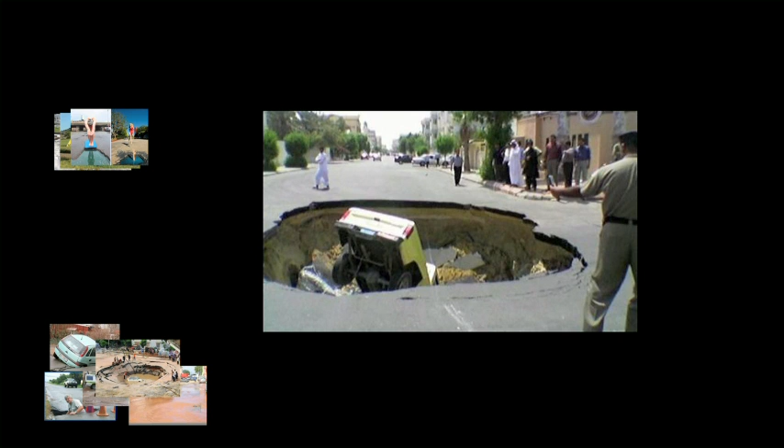I'm an engineer and geologist by profession. I've been at CSIR for 36 odd years, doing research full-time in various aspects of roads, specializing for quite a long time in unsealed or gravel roads, and this moves on to low-volume paved roads and then ordinary paved roads. My interest in potholes really started with gravel roads, because once they form, it's very difficult to get out. It just carried on as I moved into paved roads. I did a PhD through the University of Pretoria on gravel road materials and performance.

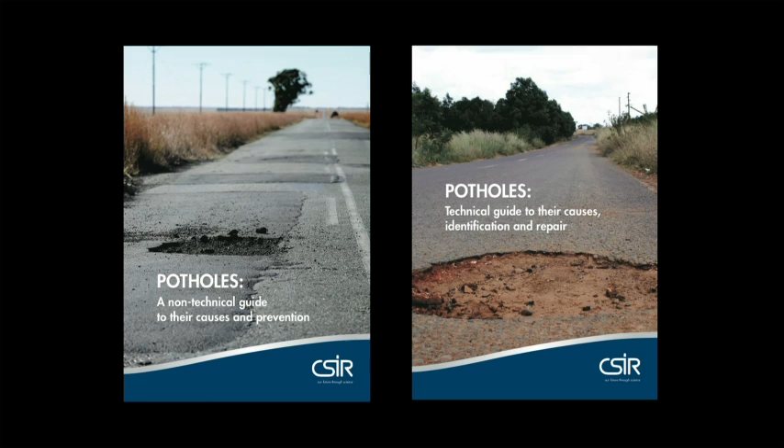Our CEO, president of CSIR, turns up in Parliament a couple of times a year, and in the early stages, end of 2009, early 2010, each time he went, everybody said, what is the CSIR doing about potholes? Essentially, we don't fix potholes, that's not our job. We do research and some initial training, then hand it over to people like the South African Road Federation to carry on the training. But the message came back that this was a worry to government, so we decided to do this project to put together the information we gained over the years into a document which would hopefully help reduce the pothole problem.

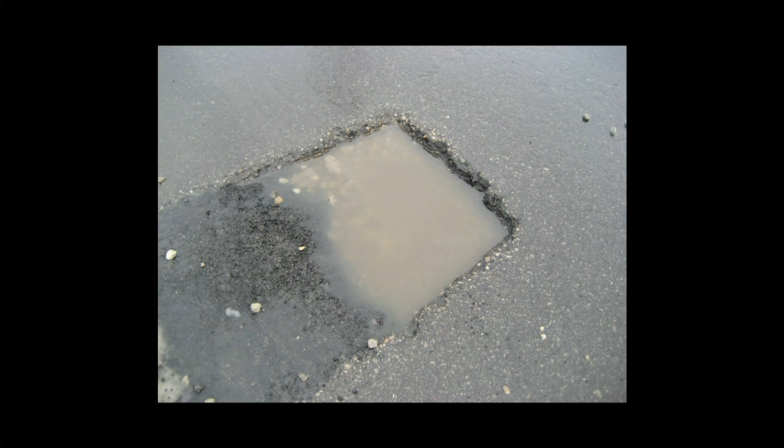It was a pretty wet summer season we had up here in the Highveld, and water and roads don't combine under traffic. With the excessive rainfall, fairly extended periods of fairly heavy rainfall, the roads started deteriorating. Potholes increased far more than in previous years, and basically the repairs couldn't keep up with them. So they became this visible, high-profile problem countrywide.

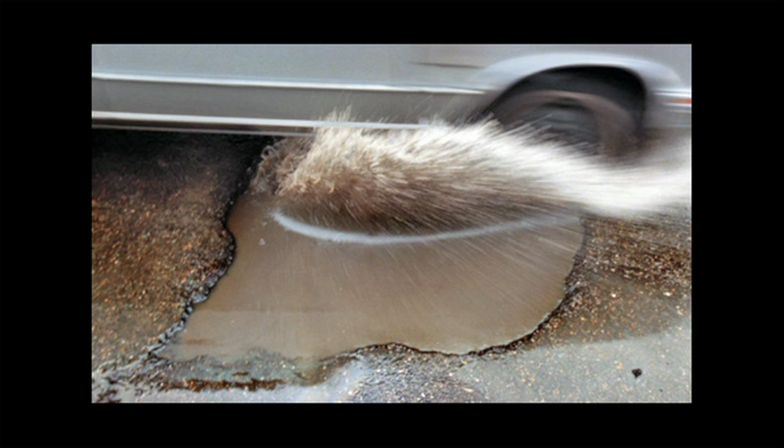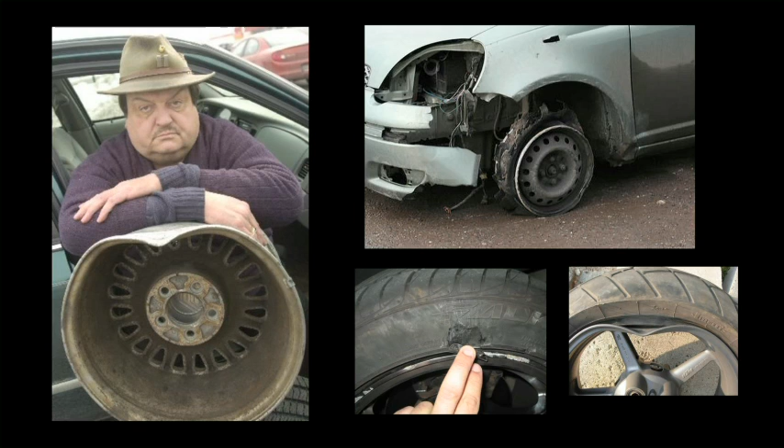Up until 2009, there had been a couple of fairly high-profile claims against road authorities for potholes - damage to vehicles, accidents on bicycles, things like that - but it was a fairly lengthy court procedure to go through. I think in 2009, 2010, where the damage was more tires, rims, some minor vehicle damage, people realized they could claim from municipalities and road authorities, and the claims started coming in. The authorities were suddenly saddled with all these claims, and they admitted responsibility in many cases and didn't even argue - paid up.

Not at all. We've seen in literature that the UK, Australia, over the last couple of years have also experienced extensive development of potholes, and in monetary terms far more than we actually need to put in to repair them. So it's not unique, but it's a legacy of cutting back in funding over the years, basically, in terms of preventative maintenance. If you Google potholes, you get quite a few million hits immediately, but they tend to be predominantly from America and Europe, and the origin or cause of potholes in those environments is somewhat different to ours.

There, where you have the so-called spring thaw at the end of winter, the frozen water in the road starts thawing out, it affects the road, softens the material in the road, weakens the road, and heavy loads on that type of material lead to potholes. That's not the kind of pothole we get in South Africa.

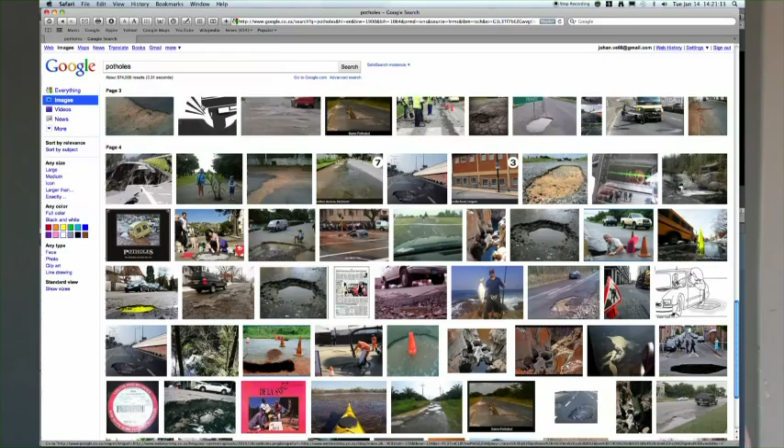The whole road network, right from the early 40s, 50s, when they started paving it, we use much thinner asphalt and thin chip seals, or spray seals as they're called. In Europe, it's not uncommon to have 100, 150 millimeters of asphalt surfacing on a road. Here, the maximum would typically be about 50, often 25 to 40. So our pavement structure is very different, primarily because of the drier, warmer environment - we haven't got the cold conditions in winter.

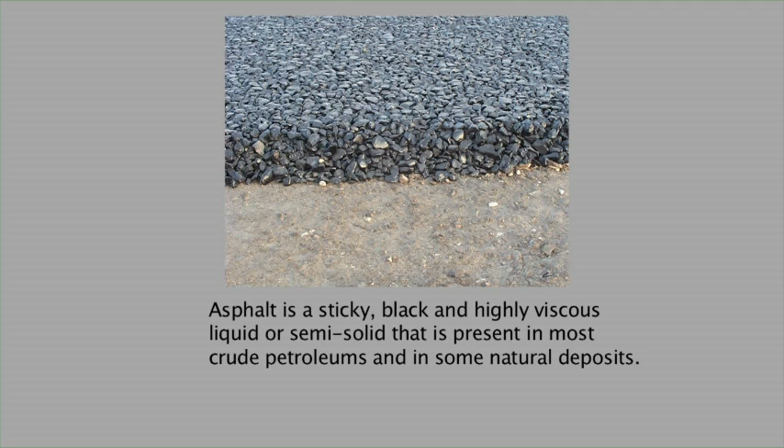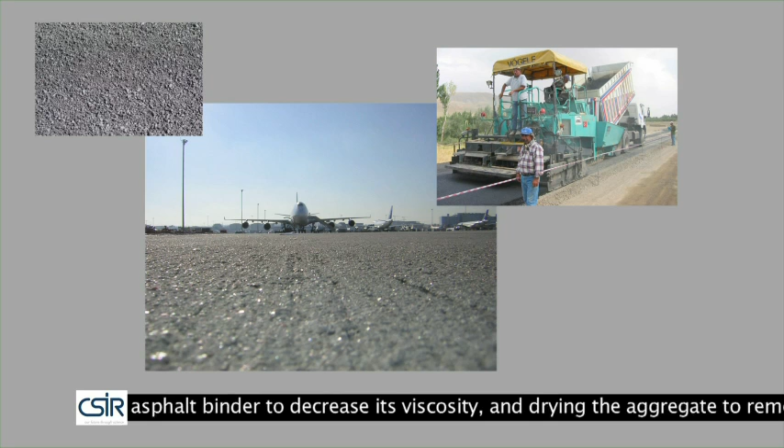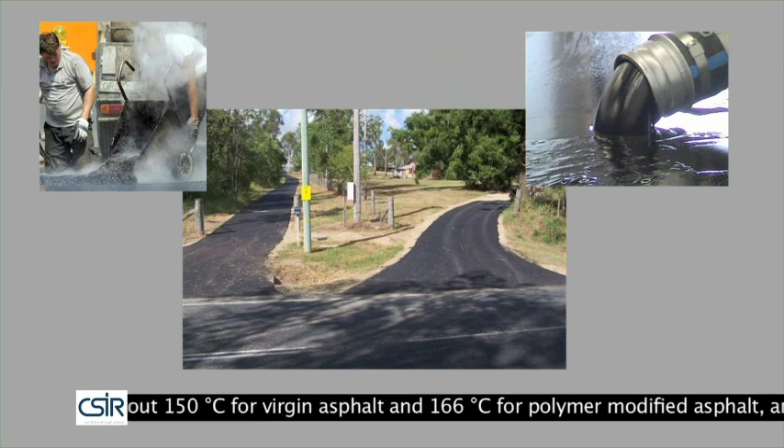Asphalt roads are paved with a mixture of stone and bitumen, and there can be two kinds. There's asphalt, made in a hot mix plant at high temperatures and placed in the road at high temperatures - a combination of usually aggregate, sand, bitumen, and some cement or lime or something. The other kind of paved road is the thin bituminous surfacing, where you spray a layer of bitumen on the road, put stone on that, roll it in, and that's basically it. Sometimes you can have two different size stones to make the seal.

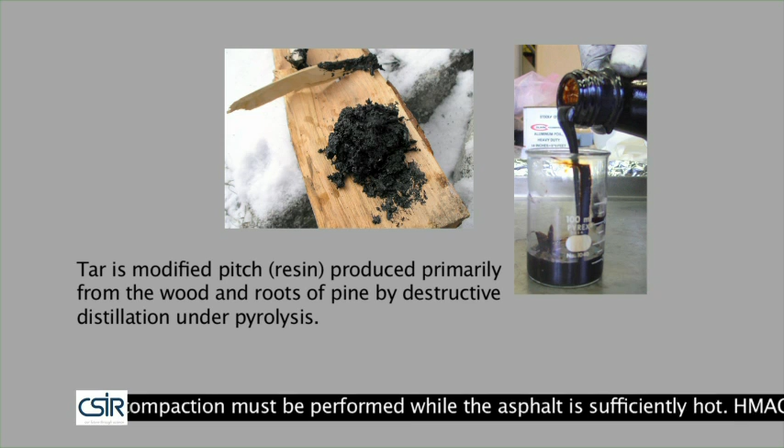Tar we don't use anymore - it's basically banned for use on roads in South Africa. It is carcinogenic. It's derived from coal, whereas bitumen is derived from oil - that's the main difference. And then there are concrete roads. In South Africa, we've probably got maybe 4 or 5% maximum of concrete roads, and a totally different process, which is cement, aggregate, sand mixed together.

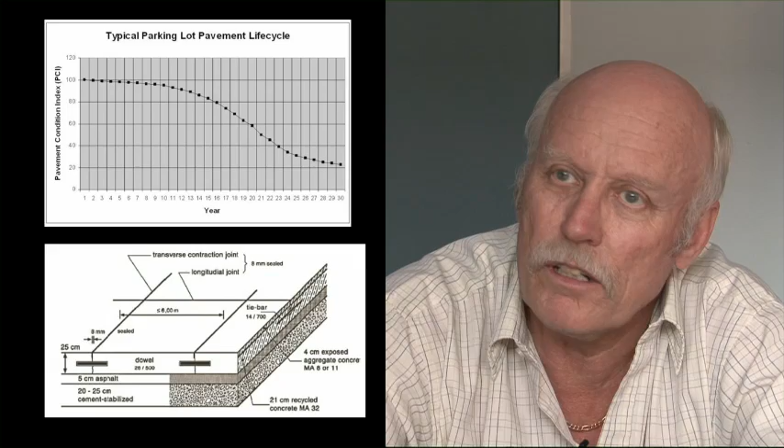A good asphalt road is designed to last probably 12 to 15 years with minimal maintenance. If the pavement layers are correctly selected, the materials, the pavement balance, and the asphalt are right, and everything's constructed properly, it should last at least 12 to 15 years without any maintenance.

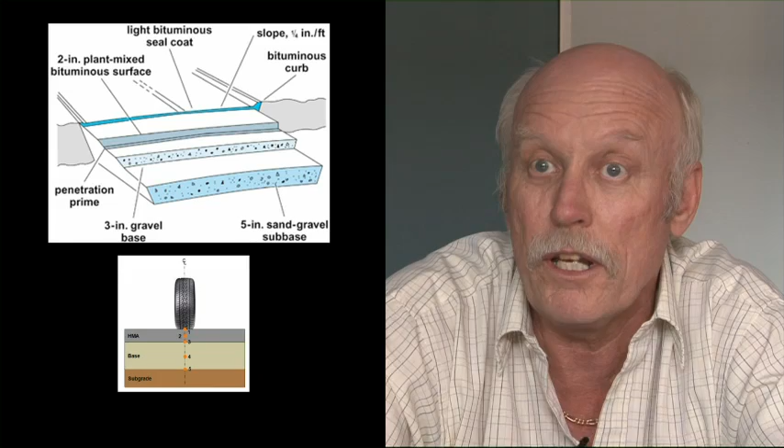If roads aren't maintained, the asphalt starts drying out and shrinking. It goes from a darker, blackish color to gray, and becomes stiffer as the bitumen volatiles evaporate. This stiffness allows it to deflect more under traffic, generating fatigue cracking from repeated bending up and down. That's the cause of cracking in an asphalt road, which ultimately leads to potholes when water gets into the cracks.

There are many different ways cracking forms in asphalt. One is poor drainage, leading to ponding of water next to the road. This could come from irrigation, seepage from a stream or dam, or, often in informal settlements, general drainage seeping into areas next to the road.

If that water lies there, it can soak into the road's structural layers beneath the asphalt, weakening them, so deflection under traffic is even higher and fatigue cracking happens quicker. It's really like bending a wire backwards and forwards - you bend it, it gets hotter and hotter, and eventually it breaks. That's what happens to a road.

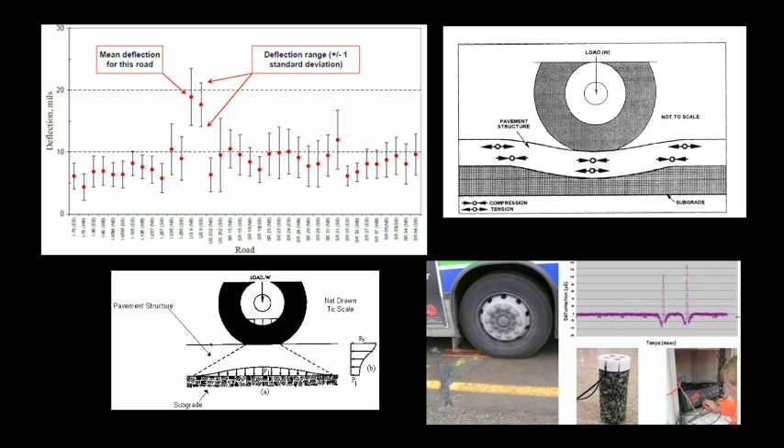Under every vehicle there's some vertical movement. A really good strong road may deflect only 0.2 or 0.3 millimeters. Other roads may be 0.8 to 1 millimeter, and we've measured even 2.5 millimeters in some very light pavement structures. As a vehicle goes across, the effect of that movement on the bitumen or asphalt is exactly like the effect on a wire, and ultimately it will crack.

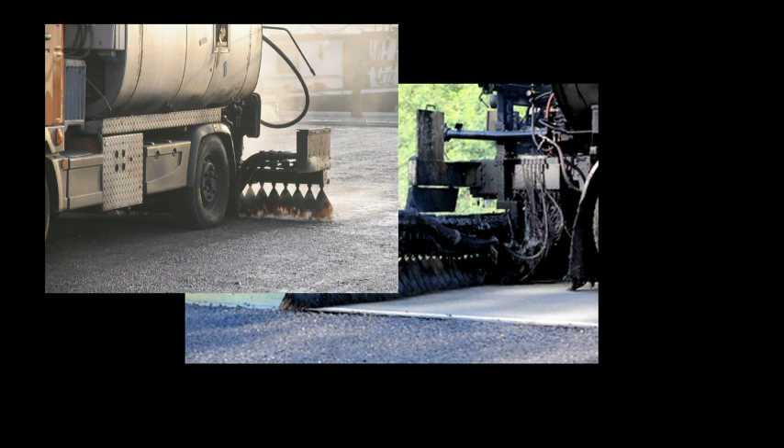Aging affects bitumen too. It's placed hot - refined and made at the factory, delivered to site at 130 degrees or more, sprayed on the road, and then it cools down. Immediately it starts cooling and oxidizing from the oxygen in the air and ultraviolet light. It starts aging, losing the volatiles which keep it flexible - chemical compounds that evaporate with time.

This causes stiffening of the bitumen, whether in a thin bituminous seal or an asphalt layer, making it more prone to fatigue.

When we don't have particularly good materials for the pavement structure, it's not uncommon to improve a weak material by adding cement or lime. That's what we call stabilization. You can turn a weak material into almost a weak concrete, which is much stronger than needed in a road in many cases.

When we add the stabilizer, be it lime, cement, or other things, it absorbs water from the layer to hydrate it, causing formation of cementitious products. This causes shrinkage of the layer, which causes cracking - and frequently when driving on a road, you'll see this typical block cracking.

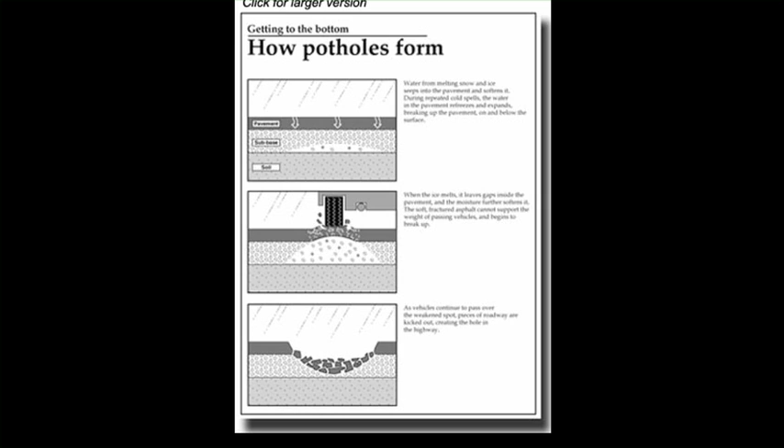If those cracks aren't sealed, water can get in. Even in the subbase - one of the support layers above which you'll have a base course, perhaps a G1 very good stone base, and then your surfacing - cracks can reflect right through the G1 and through the asphalt or other surfacing and appear at the surface. That's when they need to be sealed with a special bitumen rubber or something to stop water getting in. If water gets in, it runs through the crack, through the base, through the subbase, into the subgrade, and you're back with a weak support layer.

This is a big problem - traffic. Over the years, from 10, 15, 20 years ago, we had mostly 2-3 axle trucks. Now we've got literally hundreds of these 7-axle interlinked trucks.

The trucks traveling on main roads have their weight controlled pretty well, so they tend not to be overloaded. But those on back roads and less important roads, where there's no overloading control, tend to be overloaded, and the effect of an overloaded axle is extremely detrimental to roads. The damage follows a formula: the weight of the axle over 80 kilonewtons - our standard legal axle load limit - to the power of 4.2. So any overload is increased to the power of 4.2, which has an enormous effect on how the road handles that load.

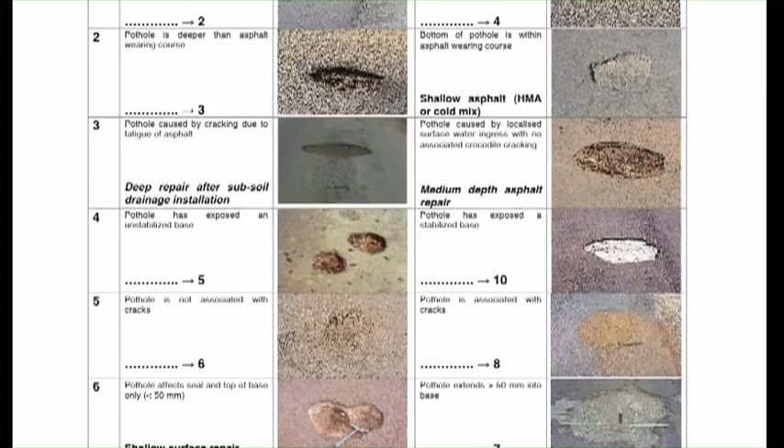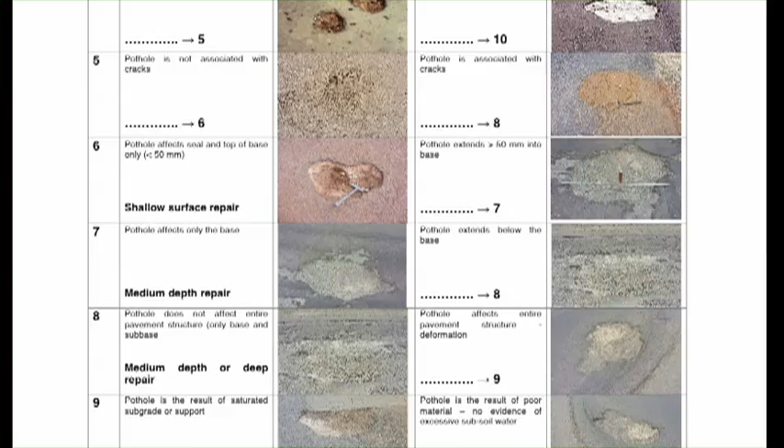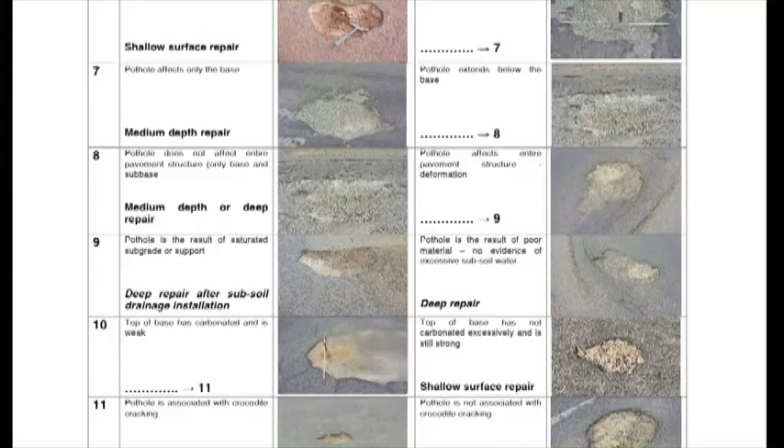When we were doing this document, we noticed there were different kinds of potholes in asphalt and thin bituminous surfacings. The thin bituminous surfacings in South Africa probably make up 95% of the bitumen paved road network, apart from the main metropolitan areas and the national highways like the N1s, most of which are paved with asphalt. Everything else is paved with thin bituminous surfacings, which vary from 5 millimeters for a sand seal up to 17-20 millimeters for a double chip seal with a slurry on top. So they do differ in the way they fail and perform compared to asphalt.

A typical thin seal, a single seal, should last 7 or 8 years before it needs some kind of maintenance. A double cape seal, which is a seal plus a slurry seal, should last 10 to 12 years, compared to an asphalt, which is probably looking at 12 to 15 years. So they need more maintenance.

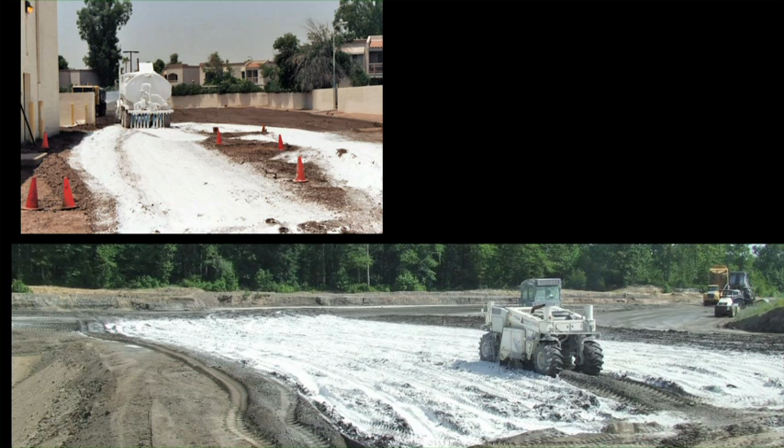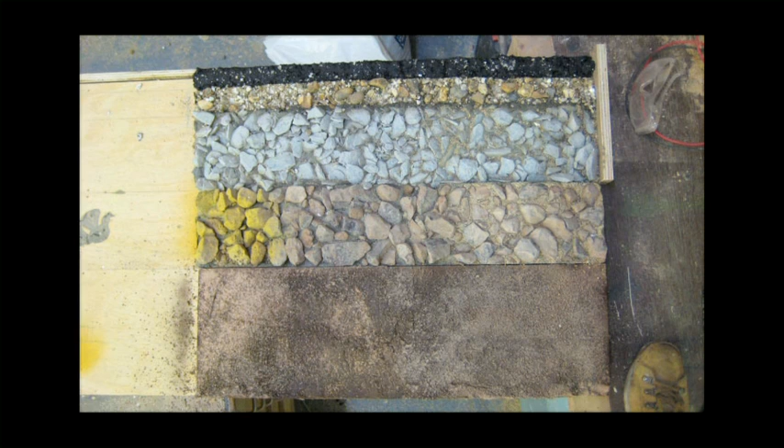As mentioned, often the top of a stabilized layer becomes weak. Essentially, cement or lime, which you use for stabilization, are made by burning limestone, which is calcium carbonate. This generates carbon dioxide, and you're left with a calcium oxide or hydroxide, which is the stabilizing material. That material is naturally unstable at current ambient environmental conditions and wants to absorb the carbon dioxide back into it and go back to limestone.

So during construction, one has to be very careful that this process doesn't take place too quickly. What we find in many cases is that the top layer does carbonate, and you get this weak, laminated layer on top. Again, there are ways of overcoming it in the construction process - it can be skimmed off with a grader before sealing, that type of thing. So there are ways of handling it. It's not a major problem, but if it's not seen in time and handled, you can get this lamination or thin layer beneath the seal, which is prone to crushing under wheel loads. Even the sealing process alone, just rolling the chip into the top of the base, can break it up. So it can be a problem, and it will lead to potholes.

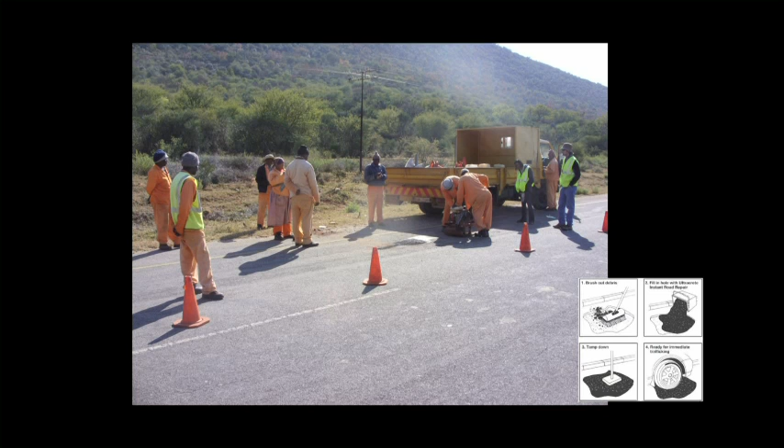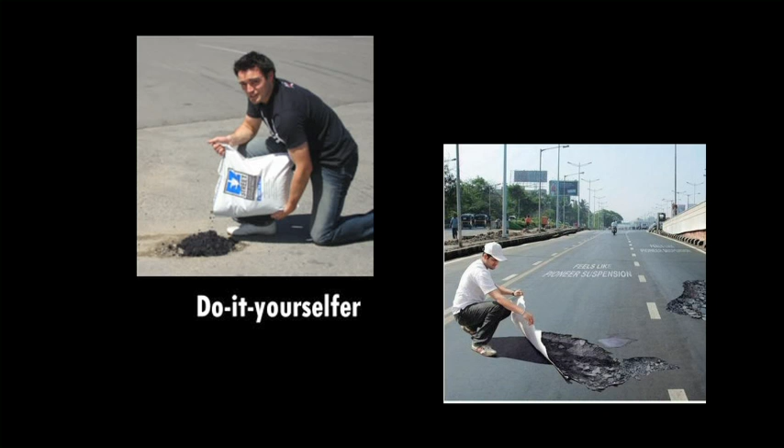This is one of our biggest problems: where potholes are seen, teams go out and patch them, but they're not actually treating the cause. All they're doing is superficially fixing the pothole. If the cause is not attacked and solved, the problem is going to fail again, or the pothole is going to form again. This is probably the biggest thing that worries communities and the public, as they see the pothole repair teams over and over at the same potholes, patching them repeatedly. One of the main objectives of this guideline is to identify the causes so that when the pothole is repaired, it's repaired properly and we don't have to keep going back over and over. It costs a lot of money, takes a lot of resources, wastes a lot of materials. A lot of potholes are not done properly, so they won't last.

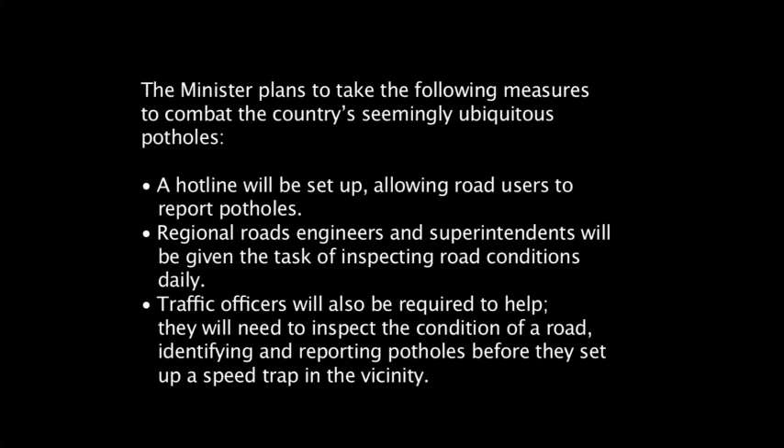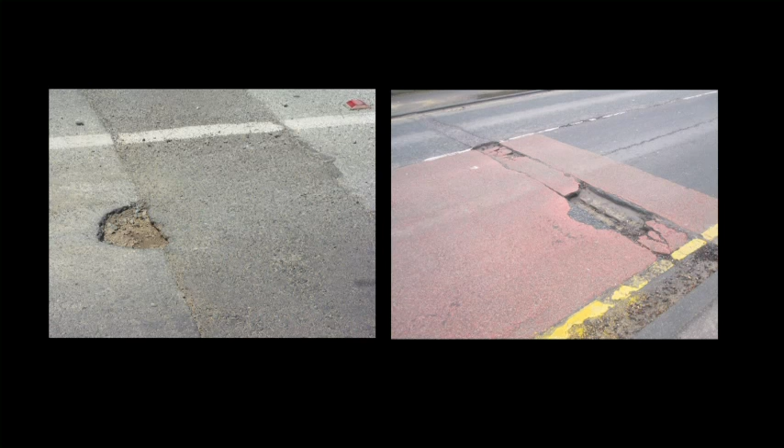But there are other areas as well, not just these. Obviously, if there's water as the problem, you need to stop that water, and that often entails the installation of subsurface drains to cut off the water before it gets into the road. We get other areas where trench reinstatements, particularly on municipal roads, where a service provider digs a trench across the road to put in pipes or wires. These trenches aren't normally backfilled and constructed to the same standard as the road, so you get some depression, the trench collapses a little bit, water ponds in that, soaks in, softens the road, and the trench fails. You frequently see potholes along the side of trenches where the join between the trench and the old road isn't sealed properly, and water gets in there.

Another big problem is people putting in a heavily stabilized material, almost a concrete, by mixing soil or aggregate with far too much cement. We shouldn't use more than about 3%. You end up with essentially a concrete block in the road, and this is going to behave differently under traffic. It's going to rock and not deflect to the same extent as the surrounding pavement, so there's going to be movement at the edges. When it starts opening up, cracks form around this block, water gets in, and problems start again. So there are a whole lot of areas of repair that, if not carefully controlled, will just lead to bigger problems.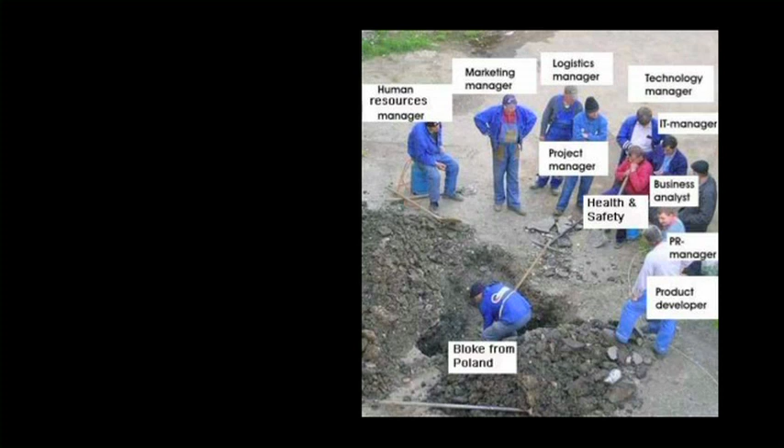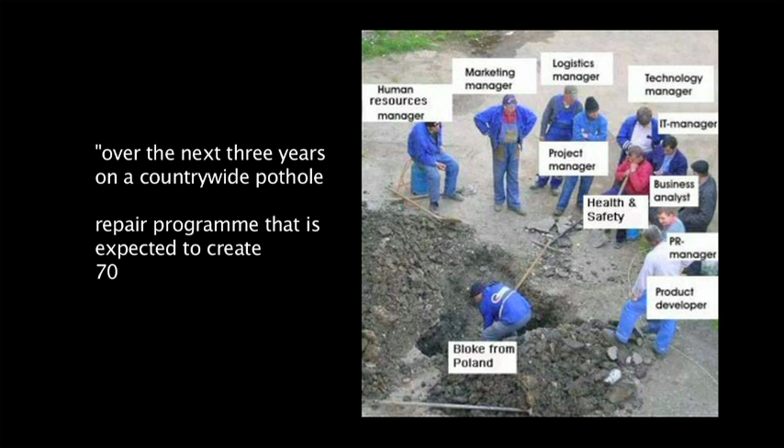The Department of Public Works is trying to increase the number of labourers on pothole repair jobs to create jobs. It's a massive opportunity to create lots of jobs - they're looking this year at creating something like 70,000 jobs. A typical pothole repair team would be anything from 10 to 15 people doing different parts of it: compacting, digging, putting in the asphalt, whatever. There are also a number of mechanical devices or machines that go around with 2, maybe 3 people and literally repair a pothole on site. It doesn't create a lot of jobs, but it's quick.

You can probably repair a lot more potholes in the same time, but it does not necessarily solve the underlying problem. You're just filling in the hole. So it's like putting Elastoplast over a problem. You're not curing the septic wound underneath it.

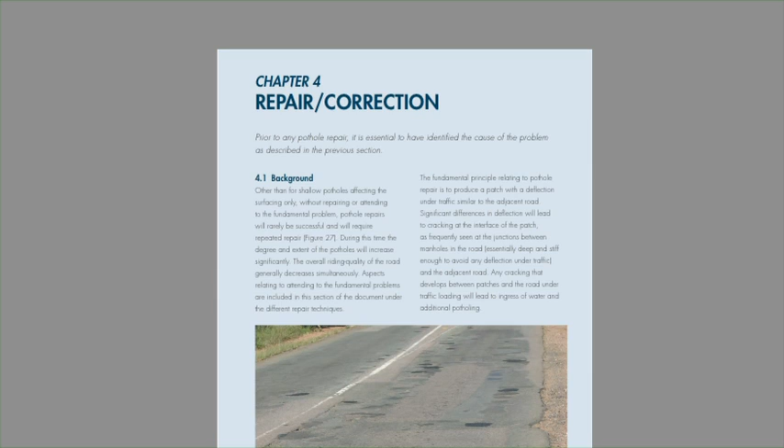Right, there are a few basic rules. In the guideline document, we've highlighted, there's a chapter on repair of potholes. And depending on the cause, there'll be different kinds of repair. The preliminary treatment is really the same for all of them, where you identify the pothole, you mark out the area to be fixed. It should not just be the pothole, because water has weakened the area around it, and there's probably cracking associated with it, things like that. So it needs to be much bigger than the pothole. It needs to be marked out.

Then one comes on site, you open it up, clean it, cut it out, typically with, we're recommending a diamond saw, but the teams can do equally good jobs with picks. Sometimes you need jackhammers if it's a stabilized layer, for instance. So you need to clean it out, get all the loose material out, get to where you've got the original unaffected road pavement basically, and then start doing the repair. So the preliminary work is actually probably the most important part of it.

Any road project obviously has got serious safety implications. People working on the road, fast cars, big trucks. We've, in the document again, highlighted some aspects. It's not really a safety document. There's lots of other documents on that, standard procedures. But there are things we've seen on a lot of pothole sites where the cones are so black from bitumen and stuff you can hardly see them, and the safety jackets are dirty and they just don't show up properly.

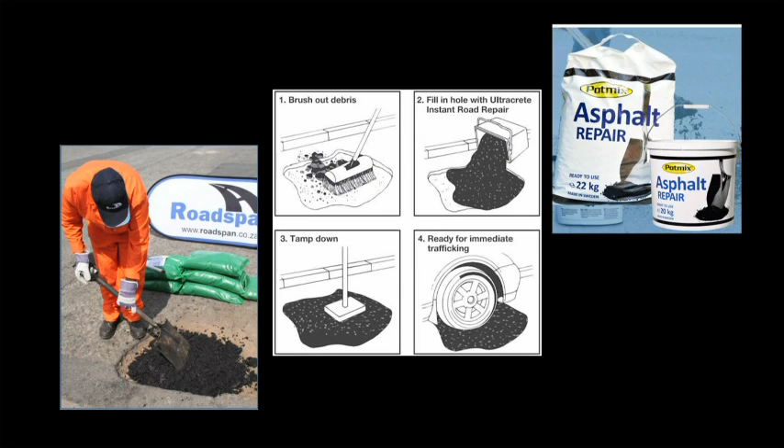Yeah, typically the pothole would be filled with different layers, and then the top layer would be a cold mix or hot mix asphalt. We can talk about that shortly. It's not unusual for potholes up to 100, 200 millimeters deep even, to clean them out and just fill them with hot mix asphalt, but it's expensive. It's far more cost effective to actually put a layer of gravel or stabilized layer or treated material or something else in first and just use the asphalt for the top 50 to 75 millimeters.

We get two kinds of asphalt, a cold mix, which comes in bags, which you can use particularly well in rural areas. In urban areas, if you've got a hot mix plant, then it's probably more cost effective. A lot of the metros have their own plants, they can make it. The disadvantage is it's delivered in quite big quantities, and it has to be constructed, put in the hole, compacted before the temperature drops below, depending on the mix, but around about 135 degrees normally. After that, it's difficult to compact. You don't get the density. It remains permeable. So in urban areas, they tend to look at hot mix asphalt.

In rural areas, there's no way you can actually deliver a truck of half a cubic meter to one pothole somewhere. So cold mix is much better. It comes in bags, open the bag, put in the hole and just compact it.

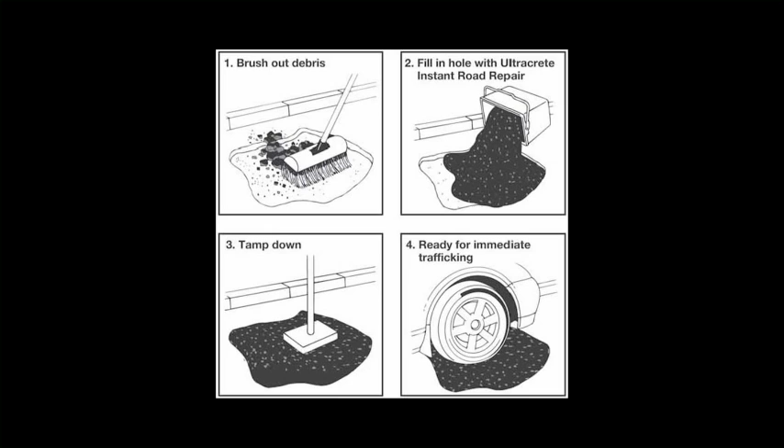The worst thing you can do, and we see this commonly, is to fill a pothole with material from the side of the road. It's often done as a temporary measure until they come and repair the pothole properly. But this usually happens when a pothole gets to a significant depth. Otherwise, they don't worry to patch it. Once vehicles start feeling it, probably 100, 150 millimeters deep, people will take material from the side of the road, put in the pothole. The problem comes when it comes to actually patching it properly.

That material is not always removed. So now it's cleaned out up to a point, leveled off, and they put cold mix or something on top of it. But you've still got this really bad, poor, moisture-sensitive material underneath it. So it's not a good idea to use these sort of typical materials you find on the side of the road. They will lead to later problems.

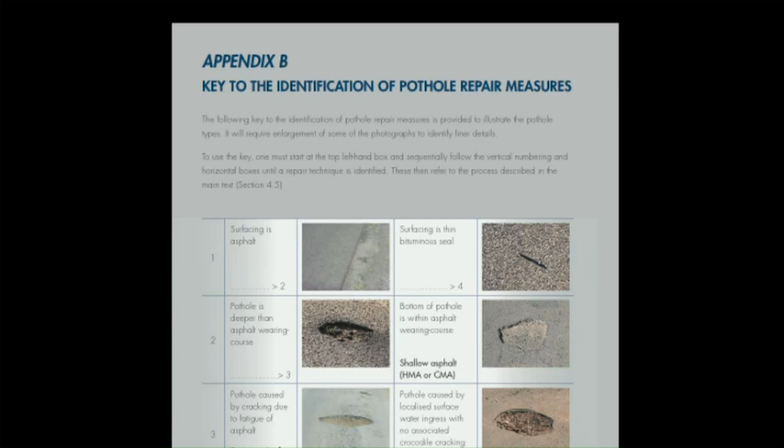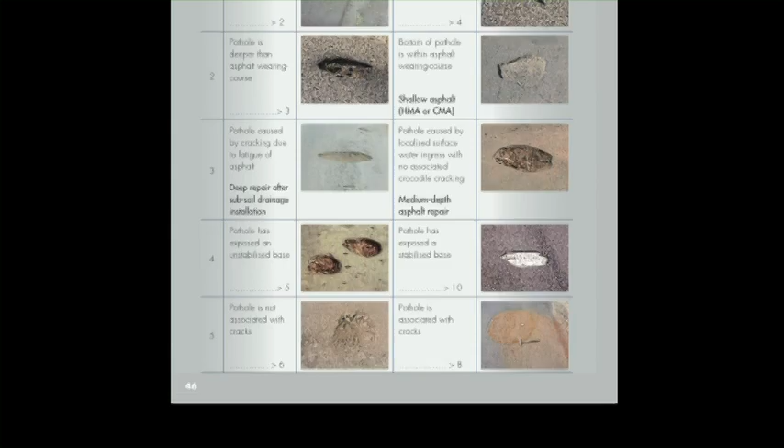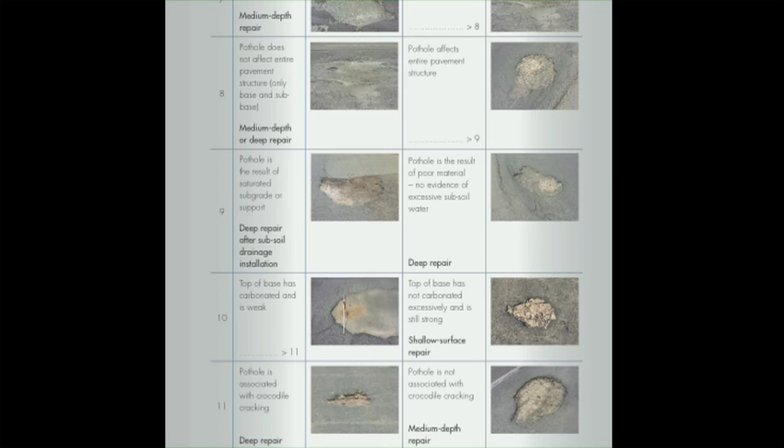The pothole guideline, when we're doing it, we identify that you need to relate the type of repair to the cause. And in the guideline, there's a decision key process where one looks at a pothole and makes a number of decisions, and it's usually a yes, no, or a this or that. It's a choice of two, and you move through the key based on these two decisions each time. And there's 11 steps in the key, and at various points you'll get either moved to the next step or

there's a solution. And that could be a shallow repair or deep repair, or asphalt with a deep repair with subsoil drains, for instance. So the document basically defines 6 major types of repair, and the deep ones could or could not have subsoil drainage with them. Subsoil drainage can be a problem because it's quite expensive, needs to be properly designed. You need an engineering input to design it to make sure it's effective.

So essentially the repair methods in the document for each of those shallow, medium and deep asphalt, shallow, medium and deep thin surfacing, there's a laid out method in the document, a process to go through how deep you need to go down, what you need to do for each layer, and basically how to repair it.

The classification of the potholes in terms of the type of repair, training for that is being done through the courses we're running with South African Road Federation. The actual repair, and hands-on labour teams who will be repairing it, that training has been done through the Asphalt Academy, where they'll actually go out and do some manual pothole repairs. So there's 2 different aspects to the document. The one is the classification, the other one is the repair.

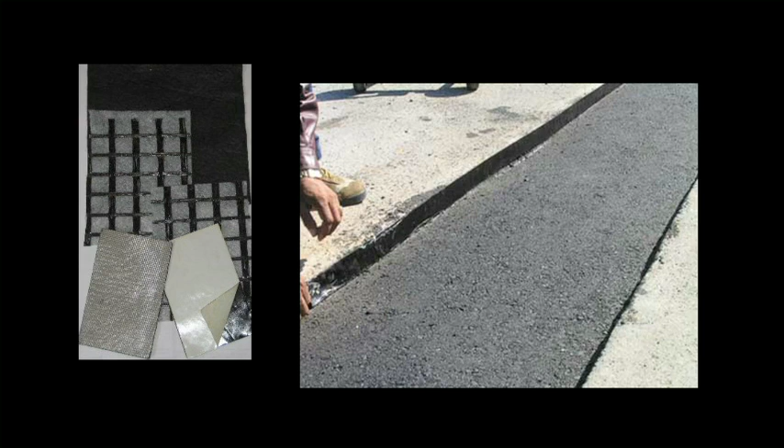And the last thing probably discussed under the quality control here is the aesthetics. The job needs to look professional. We don't want lumps of black bitumen in a grey mess. It needs to be nice, square or round, although round is very difficult to make. We're suggesting square, rectangular or diamond-shaped patches in the document. They just look more professional and better engineered work.

Yeah, so that's essentially the quality control. And up to now, that hasn't been a major thing in pothole patching. But hopefully now, through the courses, people are saying that's what we need. We need to check that quality. One of the problems with quality as well is that it needs to be monitored at different stages. Compaction in a hole has to be monitored before the next layer comes in. Whereas adhesion, for instance, of a geosynthetic strip to the surface, that probably takes 3 or 4 weeks to actually bond and stick down. So there's different times that different things need to be controlled.

And that's one of the dilemmas now. Who controls compaction? The contractor? Or do we have an engineer or inspector on site the whole time? And this is one of the things that needs to be sorted out. We're trying to have a sort of standard record where the contractor will mark things.

One can go back later and check if he did try and pull the wool over everybody's eyes, which could or could not happen. But again, we're also saying the contractor should give some kind of product performance guarantee. That if he patches the hole, both the workmanship and the cold mix or hot mix or whatever he's putting on top needs to be guaranteed for a year or 2 years or whatever they decide in the contract. And that'll put the onus on the contractor to make sure the job is done properly.

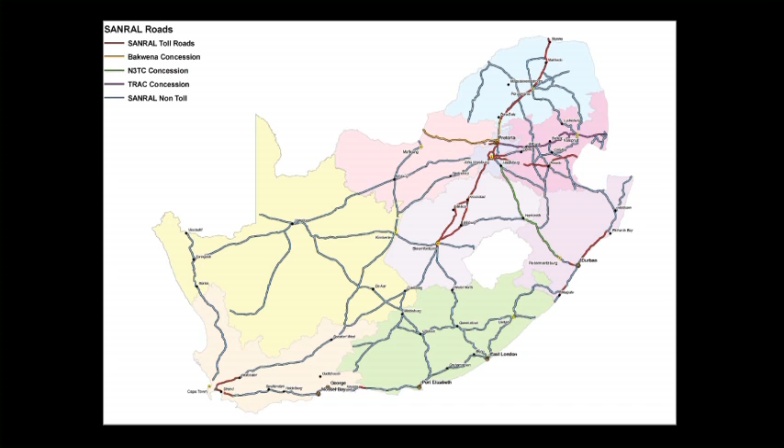It's interesting because if we look at the road network in South Africa, I think more than 80% of the road is long past its design life. A road is designed for 20 years. If you get 25 years, you're probably doing well. There are roads 50, 60 years old that are still there. They're still structurally sound, but they're giving problems because they haven't been maintained, that's all. The cracks have not been sealed.

The length of road built in the last 10 years is probably minimal in terms of the overall 200,000 kilometers of paved road that we've got in South Africa. So our biggest challenge is this aging network. And we've seen the asset value of the paved road network is probably around about 800 billion rand. That's what it costs us to replace the paved roads now.

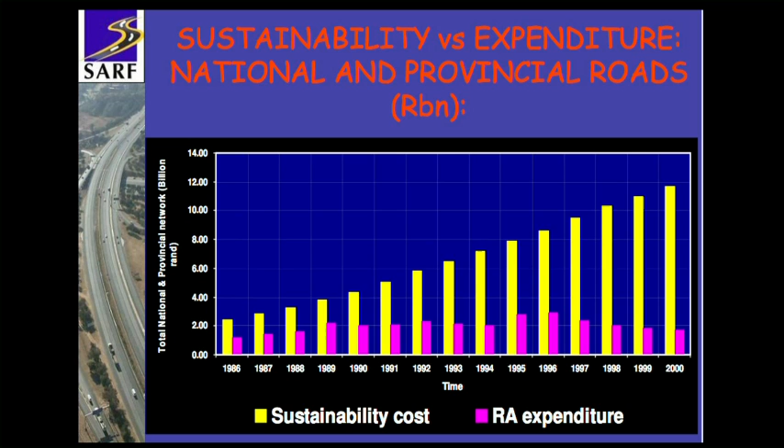If we say it needs maintenance every 7 years, we should be spending probably 100 billion plus per year on maintenance. And currently I think we're spending around about 30 billion. So we're falling behind. And this is exactly what I said earlier, in Australia and America, the problem with road maintenance is there's no immediate political benefit. The benefit is only shown 10 years' time when you've still got a road.

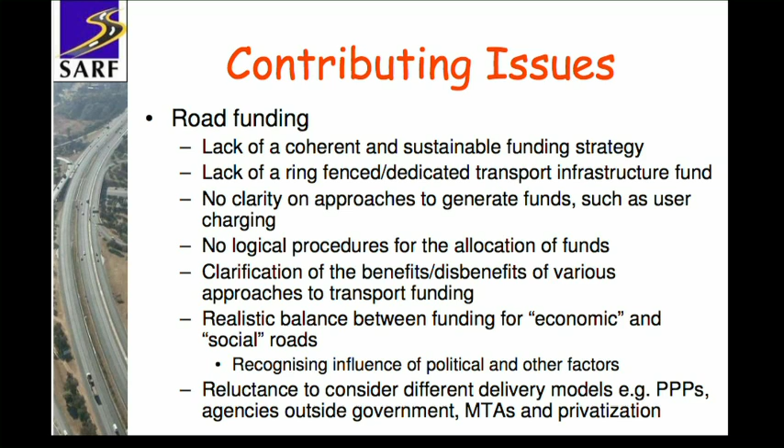But by then most politicians and managers and people have moved out of the system. It's not their problem anymore. And these are the challenges one needs to overcome to be able to spend some money on something that you're not going to see any benefit on.

Yeah, obviously budget's a big challenge. I think everybody recognises the problem now. I've actually been down to the Parliamentary Portfolio Committee on Transport together with the major road authorities, and the chairman of that Portfolio Committee was really interested in what we were saying in terms of budgets and amounts of money needed and what's causing the problems. So I think at least now the politicians understand the problem. That's the main thing.

I mentioned just now, we probably need more than 100 billion a year just to keep up, let alone kill the backlog. Whether that'll ever materialise is another problem. It's got to come from somewhere, yeah.

Most university engineering courses have a transportation or a road design module. It's fairly superficial. I think it gives them the basic understanding, but it's really the structural design of roads and the rehabilitation. There's very little in terms of maintenance, hands-on type things like pothole repair. There are courses; Road Federation run a number of road maintenance courses. This document has been seen by the university people now, and they're dishing it out as part of the course in a number of cases.

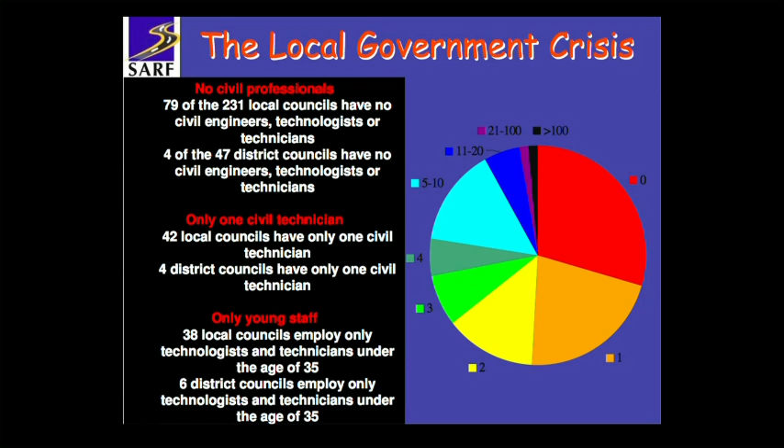We all know the sort of skills gap currently in South Africa, where there's a large pool of plus-50 white engineers, and then there's a fair gap, and then there's a pool of probably minus-35, minus-30 black engineers. A lot of them are Technikon trained, university trained, so they just do not have experience yet to do what the older generation is doing.

So there's this skills gap there, and that's our biggest challenge, to transfer the current skills down to the emerging engineers. And hopefully books like this document will help in that respect.

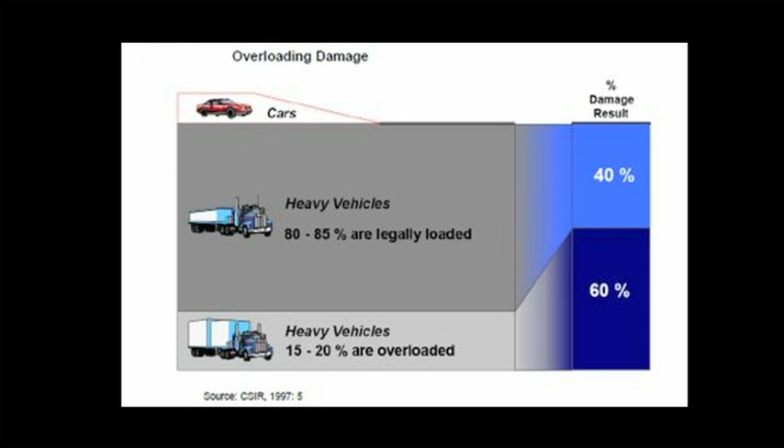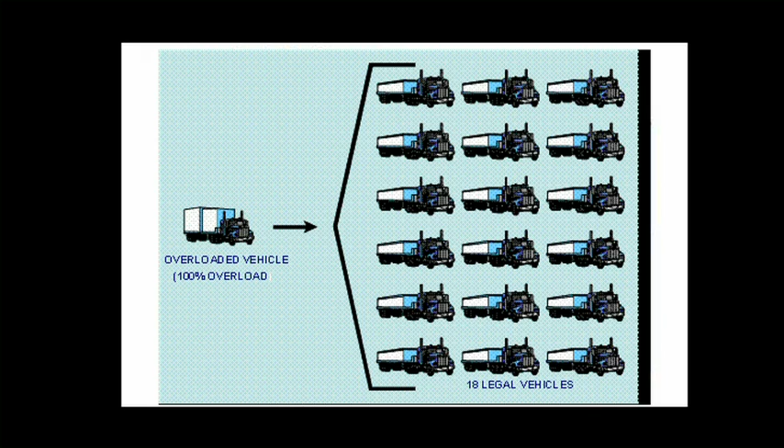Well, that's a sore point. Over the last probably 15, 20 years, we've seen the proliferation of heavy vehicles, large trucks on our roads. Everybody sees it, everybody complains about it. In the morning traffic jams, there's big 7-axle trucks stuck in the middle. And the movement of freight from train to truck has just increased exponentially.

My personal opinion, and I think a lot of people agree, is that we need to get that freight back onto rail. We need to upgrade the rail network, get as much freight as possible back onto rail, and keep the roads for light delivery and for commuter type traffic.

We know that you can never solve the congestion problem by making more roads, wider, more lanes. It doesn't solve the congestion problem. It just attracts more traffic. So the only way is to try and get the slow-moving heavy vehicles off the road.

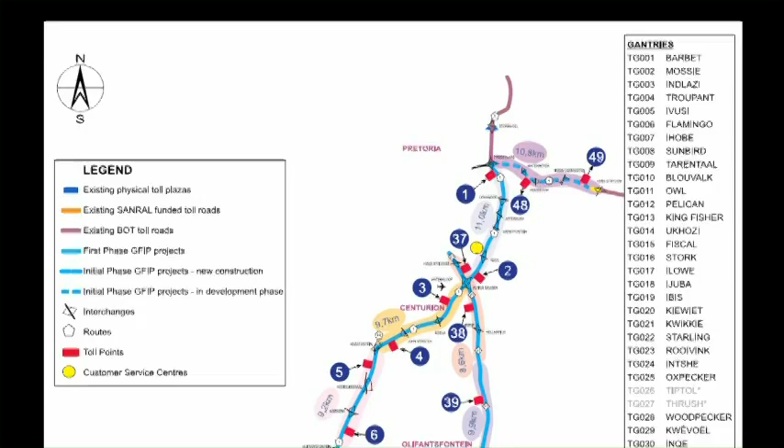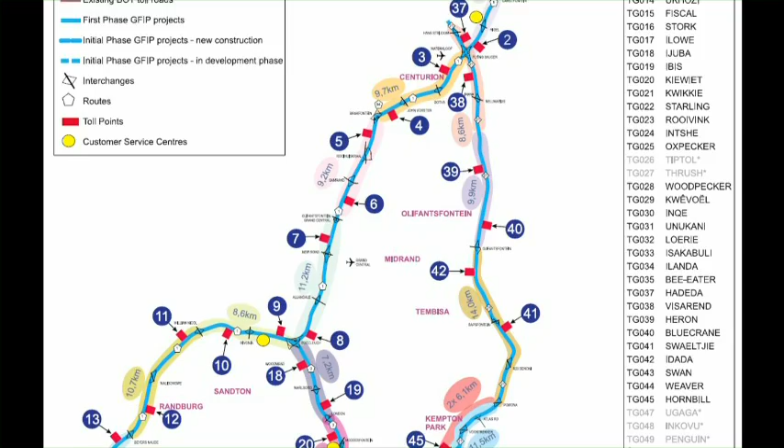Yeah, I think the GFIP, Gauteng Freeway Improvement Program, is certainly going to alleviate some of the congestion problems on the highways. It's not going to alleviate the congestion problems getting off the highways, because the roads, once you get off, have not been upgraded in most cases. So the problems are going to be at the interchanges. But at least with 4 or 5 lanes, the traffic will move a bit quicker. So I think that's a good step.

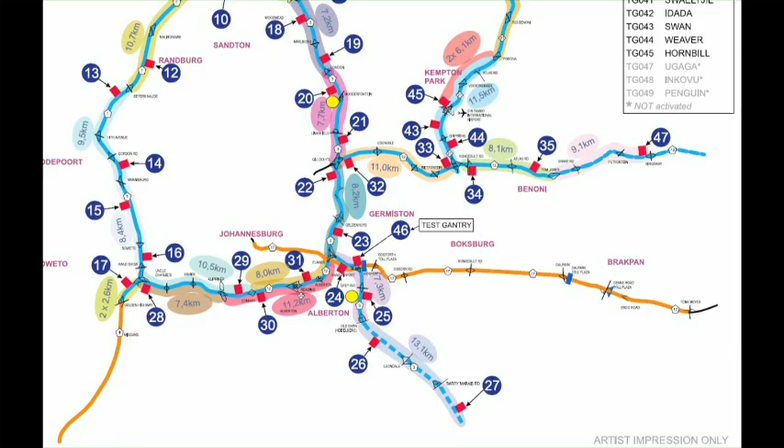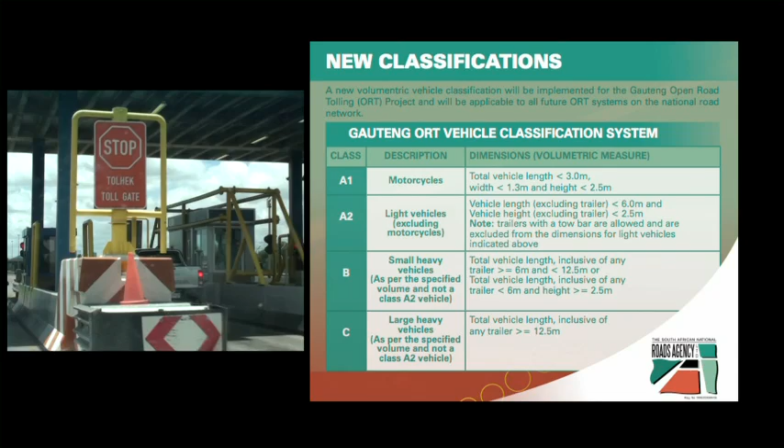In terms of the tolls, probably at first there'll be a bit of resistance, but when tolls first started in the late 70s in KwaZulu-Natal, people were taking all the back roads, but they soon learned it's actually much quicker and cheaper to go on the toll road.

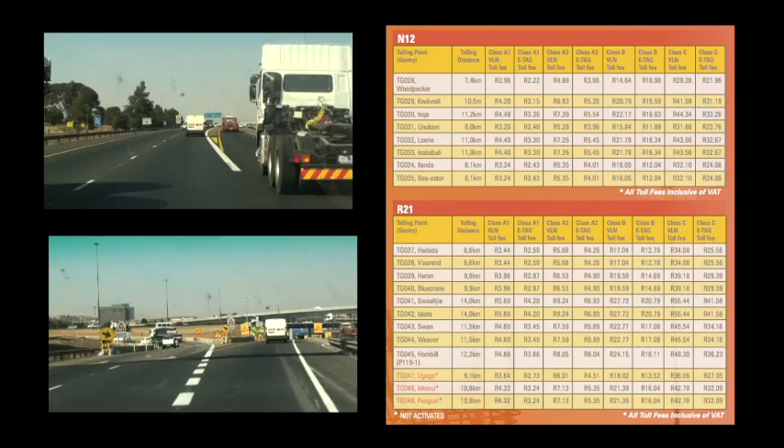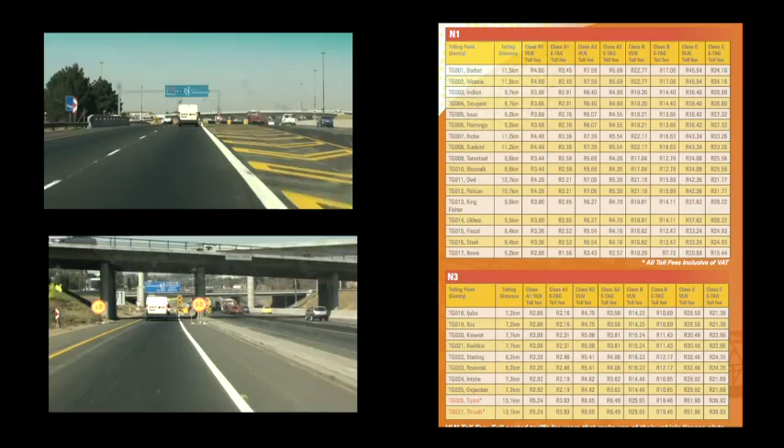Yeah. The Gautrain certainly is going to alleviate a lot of the congestion in peak hour between Pretoria and Joburg. I think that's a great system. I personally hope and probably think that it will be expanded at both ends into ultimately an underground system for Joburg. That's the way it's got to go. Joburg needs some kind of mass transit system like that, so that's a good starting point. And probably Pretoria down the line as well, but that's open to conjecture.

The first thing we need to do, and I think government has recognised the problem now, the whole pothole problem is a result of neglecting road maintenance over the last 10, 15 years. Say 15 years ago, every province had a pavement management system where every year data was collected, it was put through the system, and it came out saying this road, that road needs some kind of maintenance. And it allowed budgeting calculations. Whether they got the money or not was another problem. But at least you could see how much money you needed and how much you're getting.

In the last, say, 10, 12 years, those pavement management systems have all gone. The only one left is SANRAL. They've still got an effective one, and you can see that in the standard of their roads. And the Western Cape still has a functioning pavement management system. No other province has, to the best of my knowledge anyway. And that's why we cannot predict what roads need maintenance, where, when, how much it's going to cost. So until we get pavement management systems going again, so at least the budgeting can be done correctly and say we need so much to maintain our roads and to catch up the backlog, we're going to have a problem.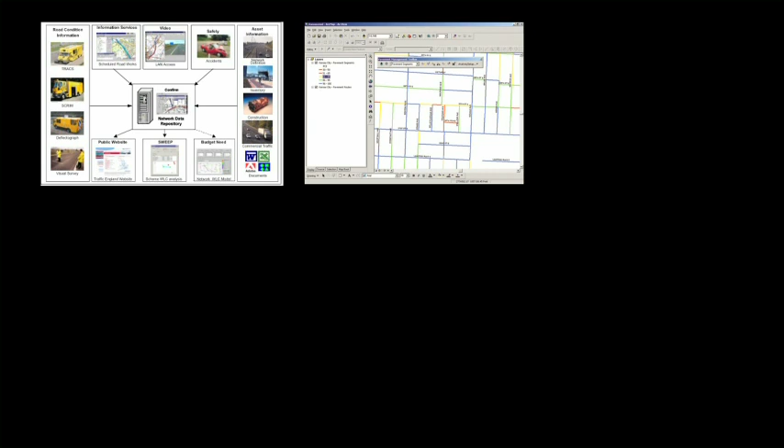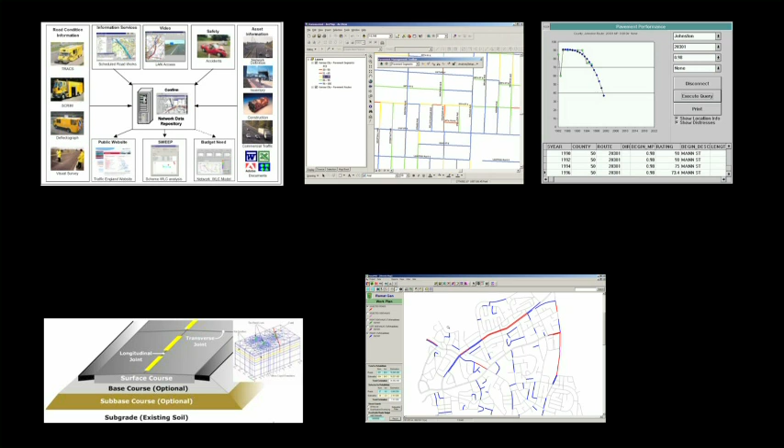So the future, I think, is basically one needs to reinstate those systems. They're fairly simple things these days. Originally, in the old days of big mainframe computers, it was a major exercise. But with PCs on the desk, and even your cell phone in your pocket, you can probably run one of these systems these days. So I think there's going to be an increase in those, which hopefully will allow better budgeting and more preventative maintenance. Because without that preventative maintenance, we're going to lose our road network with time.

As for the trucks, whether they stay or go, I don't know. There's a lot of people employed, a lot of money invested in the trucking industry. I can't see it just being changed overnight. But until the railways become more effective, that's not going to happen. If one could send goods cheaper by rail, then it would look after itself.